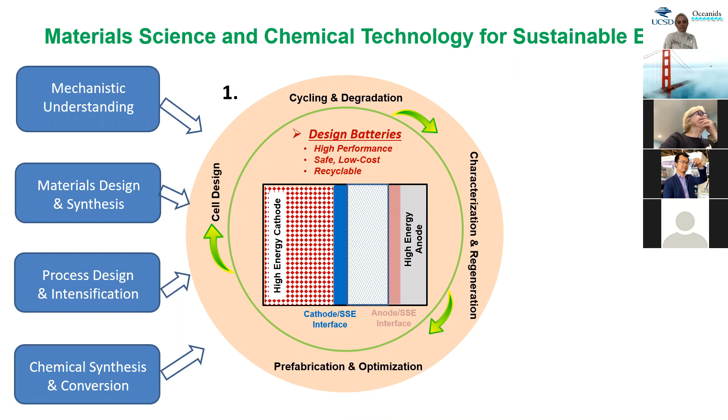Besides this, we also have a lot of applied research to try to solve practical issues. For example, in using batteries, we don't want to have any fire hazards or explosion issues. We want to design batteries that can last more than 20, 30 years. And we also hope to help astronauts and, for example, NASA send satellites to provide power in space, so these batteries can tolerate very high temperature as well as very low temperature down to -60, -80, which your cell phone or laptop batteries cannot afford. But what I'm going to talk about is mainly the recycling issue or sustainability issue in topic 1.

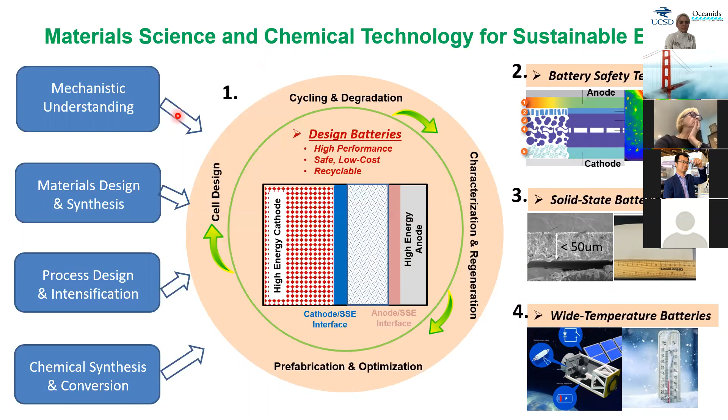Tesla, actually Elon Musk has done a very good job in reducing the cost of electrical vehicles, but still the cost is a little bit too high to make sure everyone can afford. We know Model 3 is more popular than Model S. One of the main reasons, I believe, is the cost. It's more affordable. So more than 50% of the cost comes from the battery for EVs, for electric vehicles.

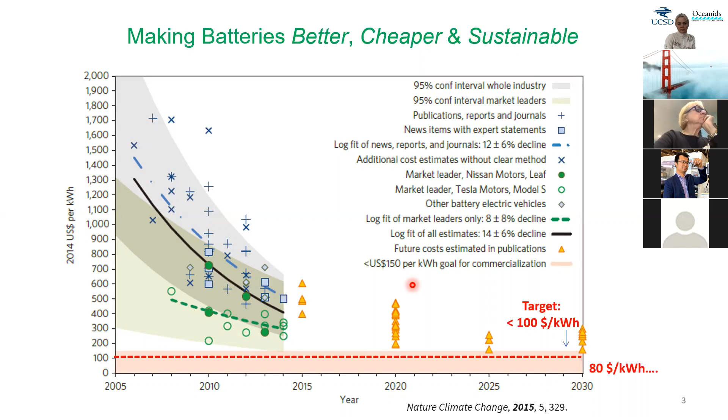So the common feature for these materials is that we have to use lithium, and we are using transition metals such as cobalt and nickel. So those metals are very expensive. I'm going to share some numbers later on, but I just want to highlight these materials at the beginning.

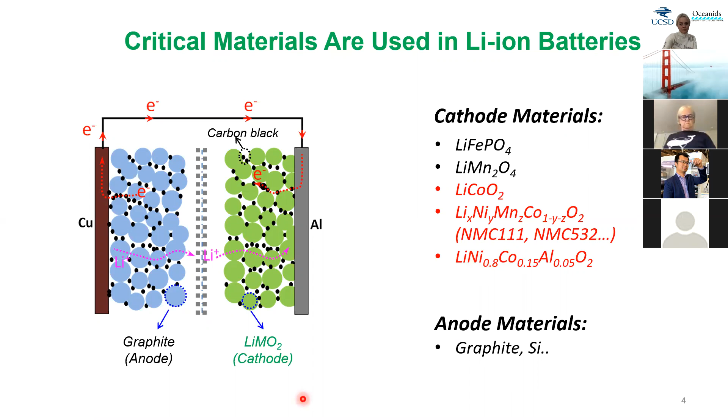So in terms of cost, we are also facing a huge demand, because I'm not sure if everyone has a basic concept of how many vehicles we are producing, for example, globally or just in the US or in a specific country. So I cannot do polling, but I want to give you maybe two seconds to think about how many cars we are selling, how many cars we made, for example, last year. Does anyone have a number? Let me see.

So I don't have very accurate numbers, but the scale is around tens of millions. For example, we made around 70 million cars plus about 20 million trucks last year. So this translates to a lot of demand if we are talking about electrification of transportation. For example, simply replacing, not half, just 10%, we're talking about almost 10 million cars using batteries. So these batteries will need a lot of metals: lithium, nickel, cobalt.

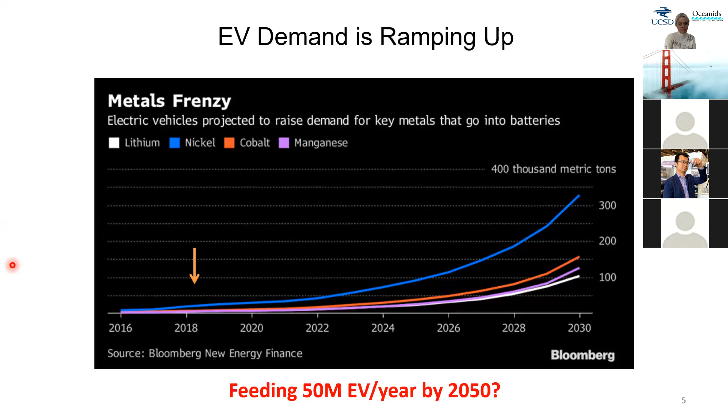If you want to compare with steel, global consumption of steel is in the range of about 1 billion tons. But cobalt in total on the whole planet, we are only able to identify 7 million tons, and we have already consumed more than 1 million tons. It seems to be a very small portion, but as we are pushing the production capacity of electrical vehicles, in the next 10 or 20 years we're going to use up all the cobalt.

And the extreme part here is that around 60% of cobalt is reserved in a small country in Africa, the Democratic Republic of Congo. This country is not a developed country because they don't have infrastructure, they don't have a stable social and political environment. In the news you can see child labor is a long-term issue. Things are changing, but they don't have very stable infrastructure. The efficiency of mining and the environmental impact have to be seriously considered and revisited.

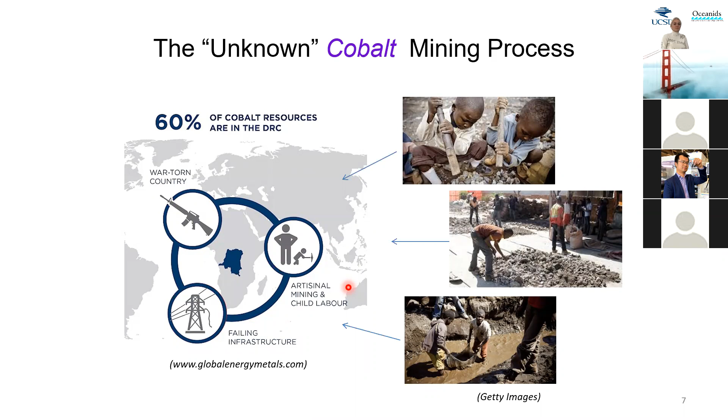And then when we talk about cobalt, there are a lot of technical issues, but more importantly, we have social issues, environmental issues, economic issues. So that's why we have to consider recycling, because if we have the battery made in a closed-loop fashion, for example, if we open older cell phones, you can see a very clear mark, or I would say label.

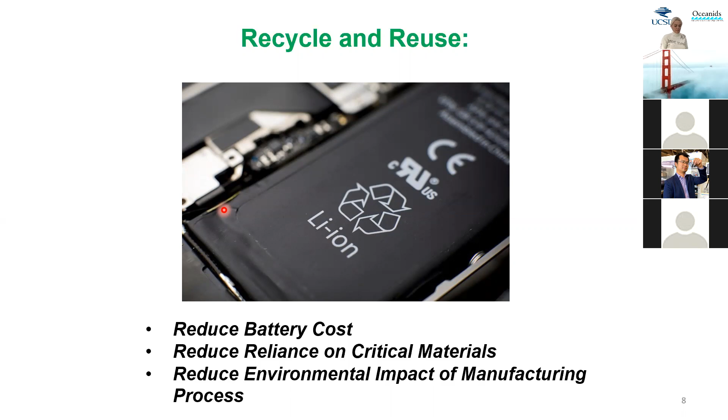We try to recycle batteries at the beginning when we design the battery. One of the reasons is to reduce cost. We also want to reduce reliance on these critical metals or critical materials, meaning cobalt and lithium, and to reduce the environmental impacts of manufacturing these batteries continuously by mining natural ores. As we just highlighted, we don't have so much of these critical minerals. We don't have a lot of cobalt on the whole planet. We have to recycle them to reduce the cost and reduce the environmental and societal issues.

So I'm going to change the topic from this global picture to a specific technique. So the reason we can recycle, well, we can think about recycled batteries. There are many ways we can consider recycling. From our perspective, we're going to take a different approach, what we call reversible chemistry or a reversible process.

So think about how you use your cell phone, how you use your laptop. You charge your cell phone and use it for a few hours or one day or two days, you use the electricity, and then you charge it. So the entire process of using your cell phone and laptop batteries is reversible because you can charge them, you can discharge them, and you can do this for one year, maybe a few hundred times, or two years. So this is exactly what's going on from the materials perspective.

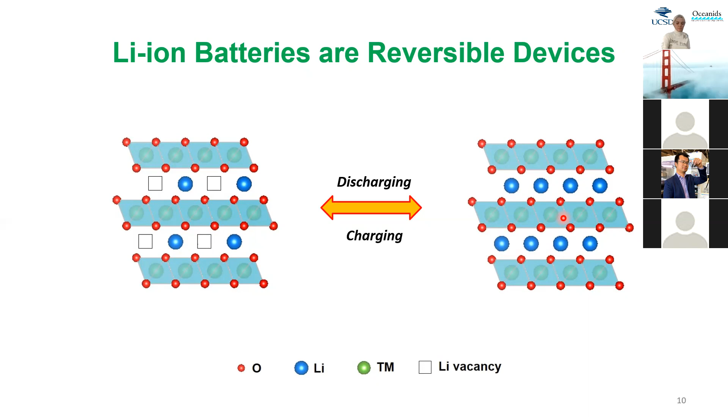Sometimes you realize one day, after maybe a year or a year and a half, that once you charge your cell phone for the same amount of time, like 4 hours or 3 hours, you can only talk for like 30 minutes, or your cell phone will power off after a few hours. Compared with a fresh cell phone, your cell phone is not powerful anymore. The reason is that besides this simple lithium travel back and forth, as time goes on, you have some side reactions, which we can identify using advanced characterization tools, like microscopy and spectroscopic techniques, to analyze the composition and structure change.

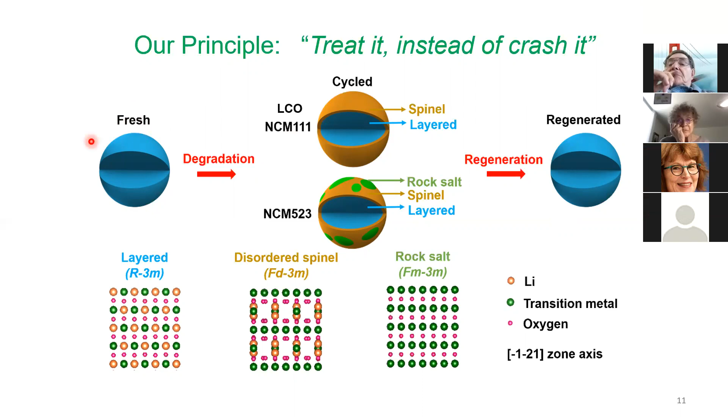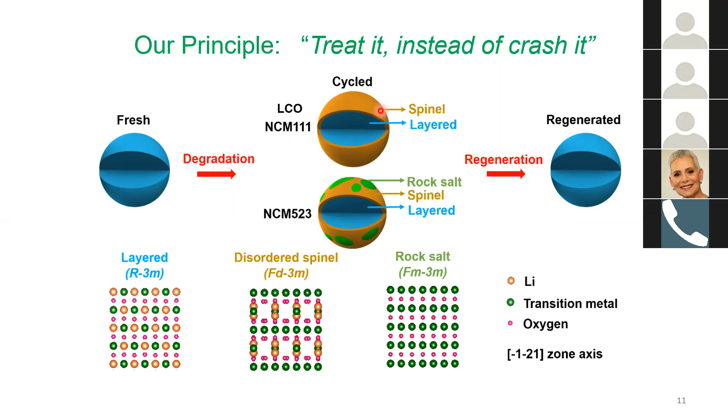So we identified there's some chemical and physical degradation. If we use this blue color to mimic fresh materials, after a few hundred cycles or one or two years, you will have a process we call degradation, inducing surface phase change to form new phases, which we do not want, highlighted here in orange and green. The original phase in blue is a very good layered structure, which we call layered because it has very well-defined order, one layer, two layers, three layers, with lithium staying inside. However, the so-called spinel phase or rock salt phase does not follow this ideal layered structure.

They have some lithium ions and nickel ions, they migrate into each other's position. They form new phases, and these new phases are not favorable for lithium ions to travel, to transport between two electrodes. So you are going to have a higher resistance. You are going to lose the amount of lithium that is going to be reversible, okay?

So what we are doing here is, by understanding this process, we are going to design a so-called regenerate process so we can reverse, we can rejuvenate this surface phase, this orange phase and this green phase, back into this well-ordered blue phase, again, back to layered structure. So this is what we're doing. So we are making a lot of efforts after understanding this process and try to regenerate these degraded particles into regenerated particles, which will have exactly the same properties as your old materials.

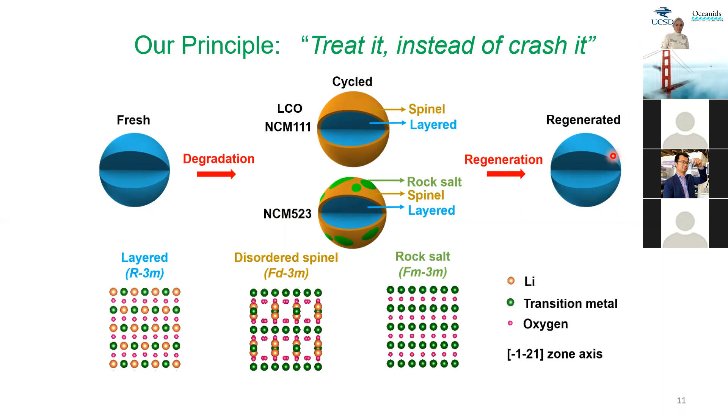Okay, so in an experimental perspective, this is exactly what we are doing. Our starting point is, if you take an example of a lithium battery, most of them will look like this fashion. You have a bag or you have a case. You have these two strips. One is cathode, one is anode. You connect it in the electrical circuit. You do charging and discharging using simple chargers, like what you are doing with your cell phone, charging, discharging them for like 300 cycles, 500 cycles. And then this reaction, so-called degradation, will happen, okay?

So to test our methods, to demonstrate our recycling process, we induce this degradation, and then we open the battery, and then we separate the materials. So actually your electrodes inside this pouch bag will look like this. They're all black. You cannot tell too much. Because we use a lot of carbon black to improve the conductivity of electrodes. And then we use some physical processes to separate the metal-containing materials, which is lithium cobalt oxide, lithium nickel cobalt manganese oxide. And then we send this powder, which we call black mass because they are black in color, to our regeneration process.

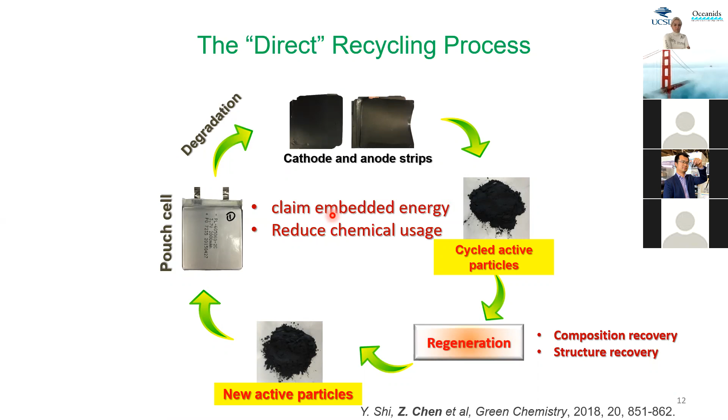So in this process, we can do two things. Number one, we do not let this material go to the waste stream, right? Because we form a closed loop process. And the second thing we're doing is to reclaim the energy that is embedded into these particles. So what is embedded energy? That is something I'm going to provide a little bit more details on in the following slides.

Okay, so I wanted to acknowledge the recyclers and the companies who are working in this recycling industry. We have a lot of companies. But if we look at this process, most of them are doing so-called pyro or hydrometallurgical process, Umicore, Retriev, Redwood. So most of them are doing this hydrometallurgical process or pyro process. But here at UC San Diego, we are doing so-called direct recycling, which is what I have just described in the previous slides. We also have a small spin-off company, which we call Unigrid, to commercialize some of the technology derived from our lab.

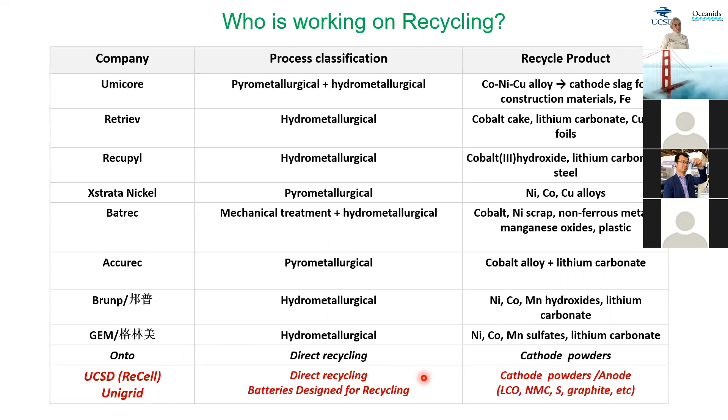So what I'm trying to highlight is to give you a better understanding of how industry is doing the mining, how current industry is doing recycling. As we pointed out, for every single cobalt atom, we have to mine them from the natural resources, minerals. The minerals contain less than 1%, normally in the range of 0.3 to 0.5%; we do not have high abundance in cobalt. In most cases, cobalt is mined at the same time as copper or nickel. So cobalt is actually a byproduct of nickel and copper mining. That's why it is so hard to get them out of the natural resources.

So anyway, let's assume we have cobalt minerals. We have to crush these minerals and separate them into small fine particles, and then we have to burn them, using high temperature and oxygen, to burn them into oxides.

And then we have to use very strong acids together with an oxidation agent, for example, sulfuric acid together with hydrogen peroxide, to dissolve them into water, into a liquid. And then we add leaching agents, complexing agents and binding agents, and we add a base to precipitate them. And then we purify them by many processes. And then finally, we get this high purity so-called precursor.

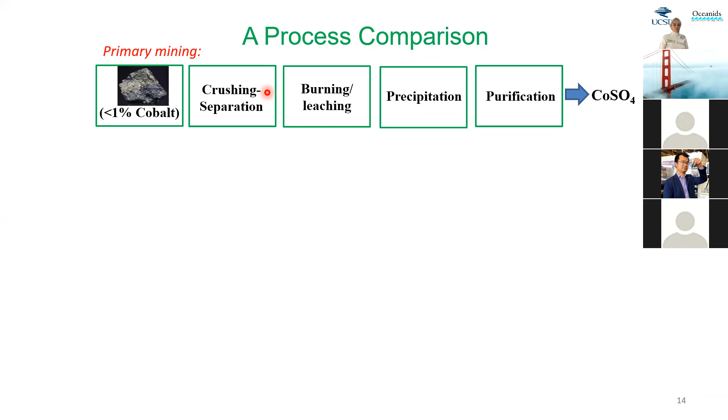This is a very common precursor to making cobalt oxide. This is cobalt sulfate. So I'm using 4 boxes to identify the typical process, but the entire process is actually very long. This is the primary mining process for getting cobalt from natural minerals. So talking about the so-called pyro and hydrometallurgical process, they actually go through very similar operation processes.

The only difference is that instead of using natural minerals, natural resources, now we use the battery, because we already concentrated cobalt from these low abundance minerals. We concentrate them into batteries. If we can put hundreds of millions of batteries together, we can treat them as our resources. Then we do the same thing.

We crush a battery, we separate different materials, plastic, metals, and oxides, then we burn them. And then we leach them using acids, and then we use complexing agent, acid and base to precipitate, and then we purify. The entire process is almost the same. The only difference, again, is only the feedstock. Instead of using the natural minerals, we're using old batteries, which have a higher concentration of this metal.

So talking about direct recycling, what we are doing is very different. We take the old batteries, we crush them, we separate them. However, in the next step, instead of burning them or dissolving them, we use this process we described previously. We send them to a rejuvenation or so-called regeneration process. Instead of a very long process of unit operations, we are trying to heal or treat them to fix the surface microstructure and the composition.

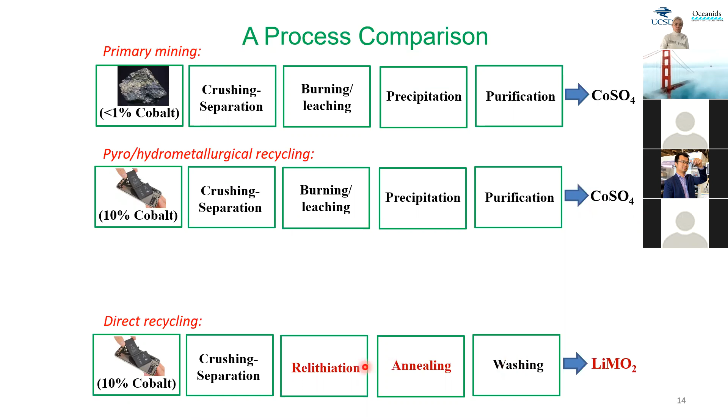And then by the end of the process, we directly get these so-called cathode materials, highlighted in red, which are lithium metal oxides, instead of this precursor. So in terms of total number of boxes, it looks similar, but if you look into the details, there remains a huge gap from this metal precursor to the cathode materials, because we have to take this precursor through dissolution, precipitation, mixing, and sintering until we can obtain these lithium battery cathode materials.

So hopefully I use these slides to distinguish the traditional mining process, the current industry pyro and hydrometallurgical process for recycling, and to highlight the difference of direct recycling. By doing direct recycling, we directly convert old lithium batteries to new lithium battery materials. So we don't have to go through this process, because for every single unit operation or chemical operation, we need to input energy. In order to input energy, we have to burn something, either coal or natural gas or nuclear power. So this energy means the embedded energy that I highlighted in the previous process.

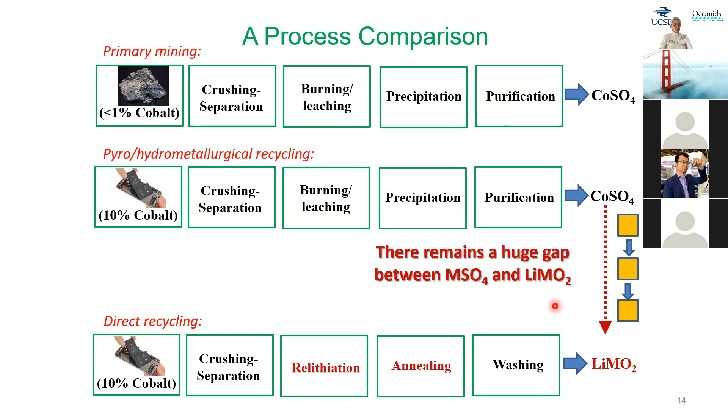That's why I said we not only reclaim materials, we also reclaim the embedded energy inside the materials that we had to spend to make them. So that is a big difference. So in the following slides, I just want to show you how we do this. Of course, every process needs to be optimized, and in our lab we have spent the last couple of years to not only invent, but also optimize the process to reduce the usage of chemicals, water and energy, to make this so-called direct regeneration process more efficient and cost effective.

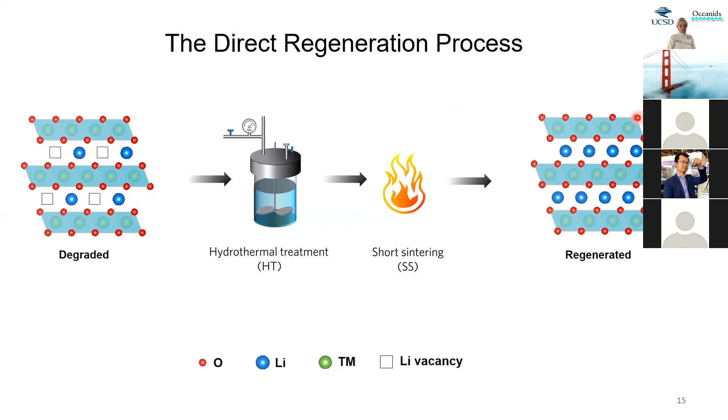So this is what we did. We have these old materials and we send them to a reactor, and then we do some process, and then we make new materials. So this is very simple, straightforward. There is some data I want to show, but it's probably too many details. So what I want to show here is how to identify the process kinetics, which tells us how much time we need to regenerate not only the composition but also the microstructure.

So we treated different materials. These are 3 different types of materials. When we say LCO, this material is lithium cobalt oxide. It's more popular in cell phones because this material is energy dense, it's very compact, so we use it mainly for cell phone batteries. And for NCM, N is nickel, C is cobalt, M is manganese. So NCM111 is lithium nickel cobalt manganese in the mole ratio 1:1:1. And by saying 523, that means their ratio changes to 5:2:3.

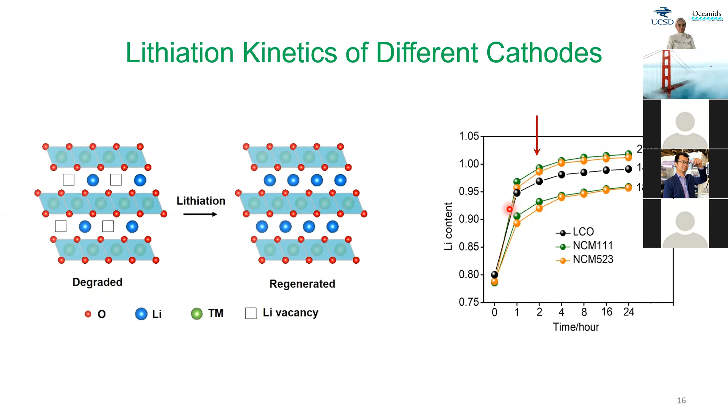This further demonstrates why we can do so-called direct recycling, because maybe 80% of your materials are still good. We don't have to do harsh treatments to crush these particles and dissolve them in strong acid, because we spend so much time and effort to make them form such a morphology, which is something we should maintain. So this is also the advantage, the rationale for direct recycling.

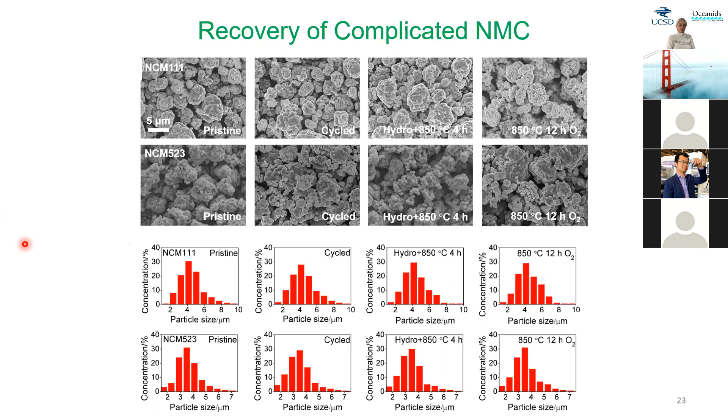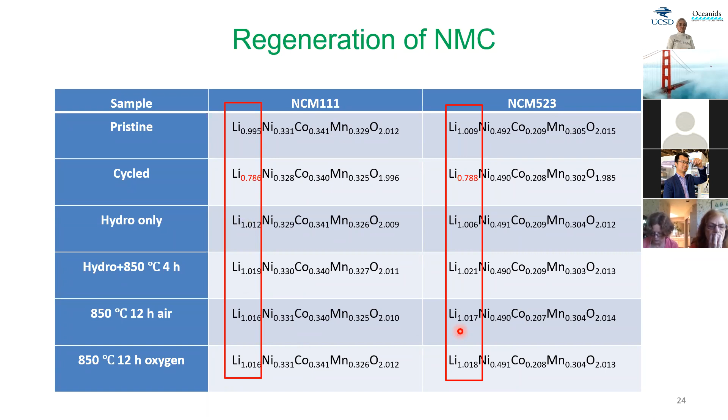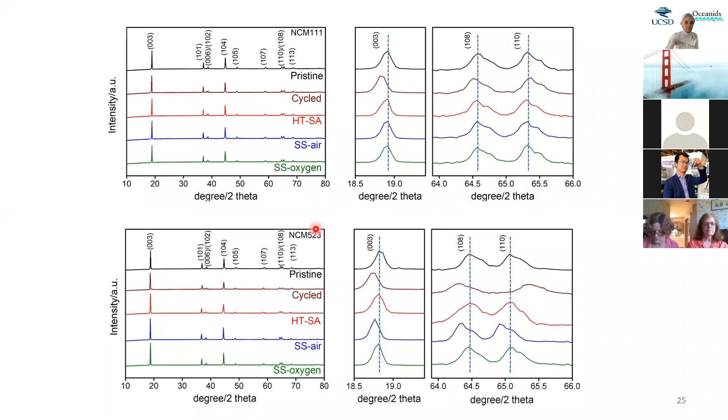If you follow my laser pointer, this is the fresh battery with the position here. After cell failing, the position shifts to the left. After our treatment, the position shifts to the right. This position shift tells us we can regenerate, we can heal, making old batteries become like new, fresh materials. We did this for NCM 111 and NCM 523, and they share very similar features.

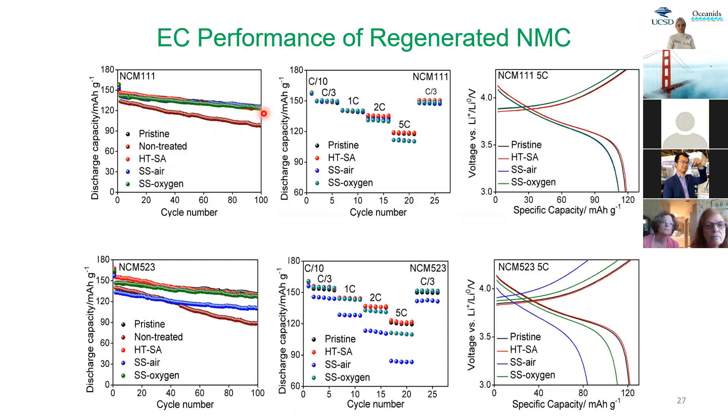What we want to compare is these numbers on the y-axis, which show the capacity, meaning how much energy we have. The rest of the curves show how much they can retain their charge or energy over a number of cycles. The rest of the curves show how much power, which means how fast. The larger the C numbers, the faster the cycling or charging rate.

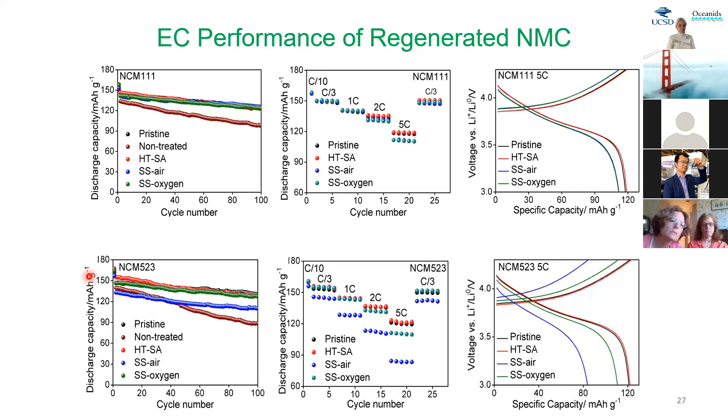And this curve just describes their basic signature, their electrochemical charge storage and charge release behavior. As the general audience, we don't have to focus too much if you do not understand a lot of electrochemistry, but I just show you some of the curves to compare how we rejuvenate and regenerate these older materials to achieve comparable performance, so that we can use them to make new batteries. We did test many different materials.

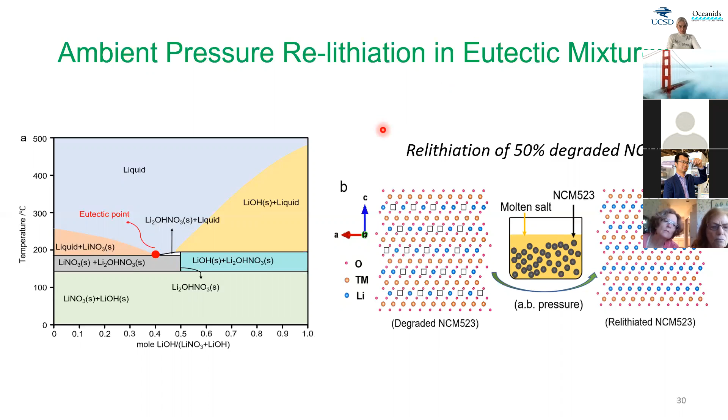So this is the process. We have a further development using new chemistry, which I'm probably going to talk about just very briefly. The purpose of doing this is to keep investigating new chemistry so that we can use a more cost-effective, more energy efficient process. In this case, we use a eutectic mixture, which lets us get rid of the pressurized reactor to do the recycling. So with a similar process, we can treat similar materials.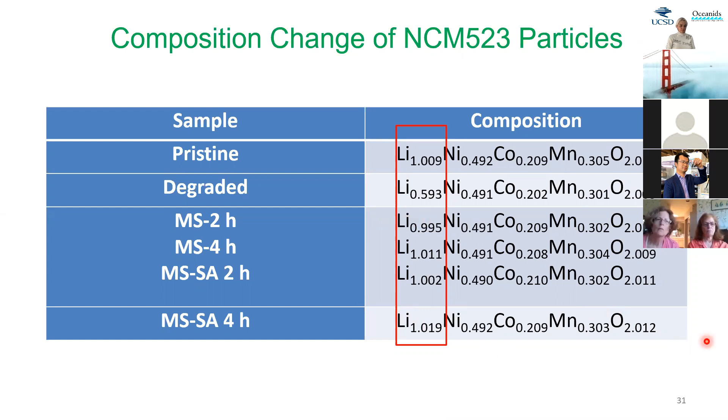As we can see, we can treat very heavily degraded materials to regenerate the composition and achieve materials that share the same properties as new materials. For example, by this condition, we can achieve a very good composition that delivers very good performance, basically reaching exactly the same level of properties as pristine. When we say pristine, that means new material. The other two are materials tested under different recycling conditions using these new methods.

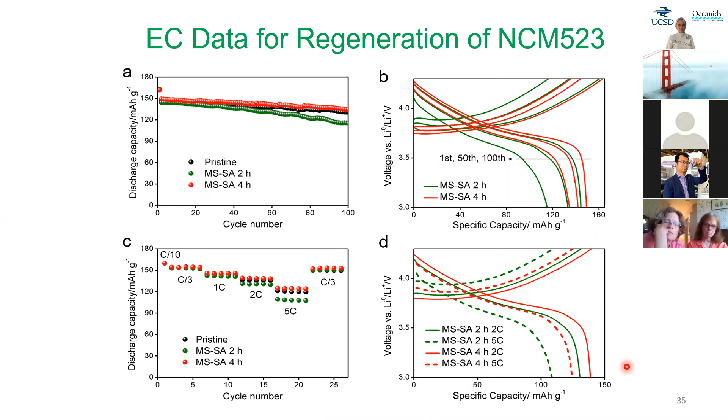The rest shows how they behave when we look at the fine structures and fine properties during the battery charging and discharging process. We have also been thinking about how we can change the chemical nature from older materials to new materials. One example I want to compare is plastic recycling. The industry is not doing plastic recycling very intensively and extensively.

The reason is that plastics, for example your shopping bag, and the plastics we use for toys and home goods, are so cheap. We have to spend a lot of time and energy to recycle plastics. So in the end, the recycling process is expensive, and the revenue we get is so low. So there's very little driving force for industry to do recycling, unless the government puts a mandatory requirement on certain industries to do that.

Or customers will pay more when we buy new plastic products. We add a price on top of the intrinsic price to save some money for recycling industry players. So that is a limitation of doing recycling. The same thing holds for batteries in future applications, where we are going to further reduce battery costs. That means we are going to use less and less critical materials and cheaper materials.

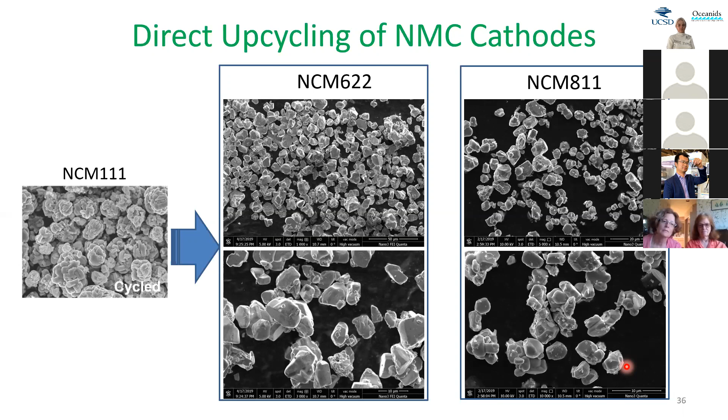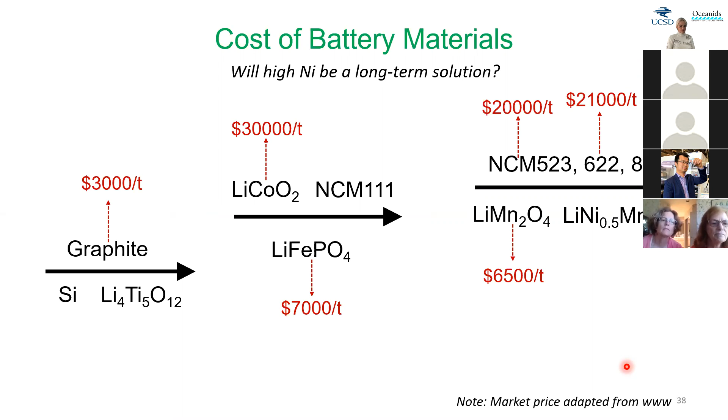So how are we going to treat low cost batteries? We have to make our process very robust, able to change or upgrade older materials to new materials. Same thing for plastics. In the end, we have to consider future chemistries. There are a lot of materials to consider; some are very cheap, some are more expensive. No matter whether cheap or expensive, when we use them at very large scale, we are talking not about kilograms or tons, but millions of tons or more.

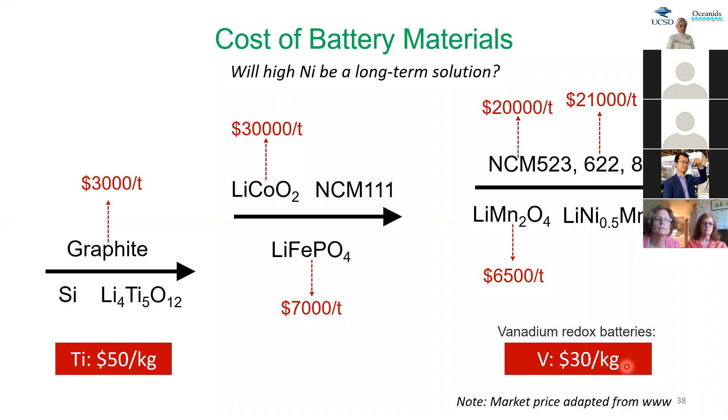So even if we replace the cobalt by more and more nickel, which industry is currently doing, for example, Tesla is doing, we're talking about cobalt-free batteries or high nickel batteries. Still, nickel is not cheap. It's more than about $12 per kilogram of nickel. And we don't have a lot of nickel on the whole planet as well, like cobalt.

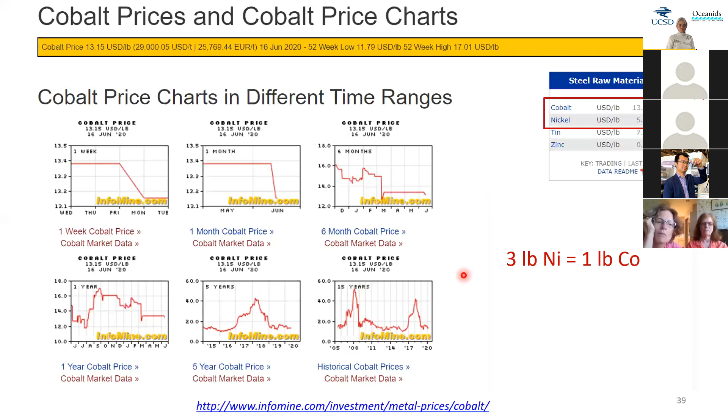So every time we see a lot of demand, for example, a rocket rise for certain products. For example, one day electric vehicles become so popular, everyone is using them, every household has at least 1 or 2 electric vehicles. What is going to happen? We're going to use a lot of lithium metal. We're going to use a lot of nickel, cobalt, and manganese. As we talked about at the beginning, we only have one planet. We have very limited resources for all these critical materials, especially for the United States.

The United States in total, for now, has only identified 55 kilotons of cobalt. That's very risky for us, for the country, because we have to fight with Asian countries, with European countries to acquire these resources. Same thing for nickel. We have more nickel, but we don't manufacture them. We don't produce them. There will be a lot of demand down the years. In the next 10 or 20 years, there will be a lot of industry issues.

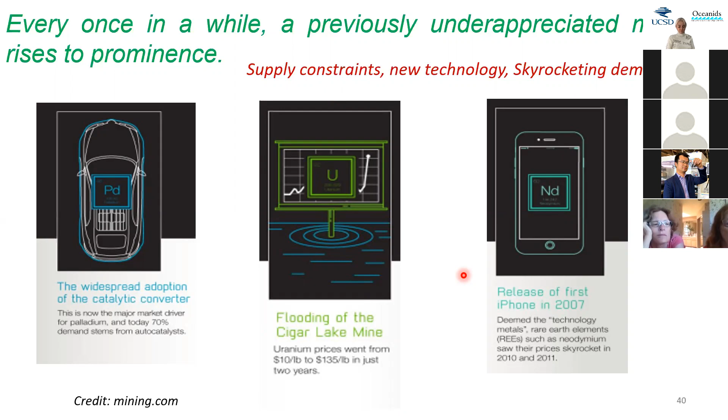There will be a lot of competition between countries to really meet the future requirements for customers, for our demand, for greener transportation, for electric vehicles, for more cost-effective products, goods, like iPhones, iPads, laptops, and electric vehicles. So this is going to be a huge technical challenge, and an environmental and social challenge.

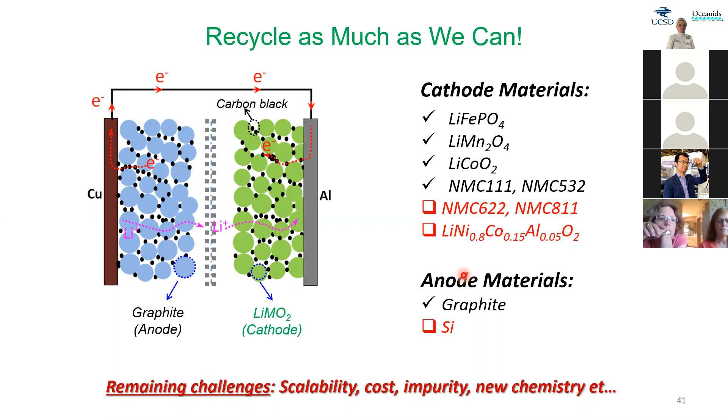So we have developed technologies to meet the demand. Definitely, what we are doing here cannot solve all these problems. We have a future. We have remaining challenges. We have future projects to keep doing and think about cost, scalability, a lot of issues to be considered. A massive amount of work to be done. But we have to think about it.

We have to start working on these problems before every household has 2 electric vehicles in their garage, and after 8 years, they're going to retire and they have old batteries to be treated. We don't want customers to pay an extra few thousand dollars to be responsible for their old cars. So we have to develop a better technology to do this job. So this is something I want to share with you today. And we have to design a lot of new technology and identify new science. And we need a lot of talent and resources to do this.

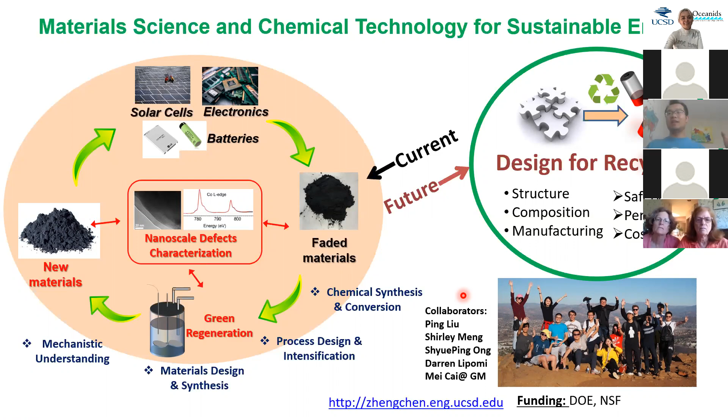So now the problem is that recycle does not mean regenerate. When we talk about recycling, like recycling other materials like plastics and papers, the collectors will carry your old cars, your old batteries to a certain warehouse. They store it. They keep it over there without doing anything because there's no mature technology. There's no profitable technology for doing that. So we recycle it, but they haven't been able to really take advantage of these resources, which we call urban mines.